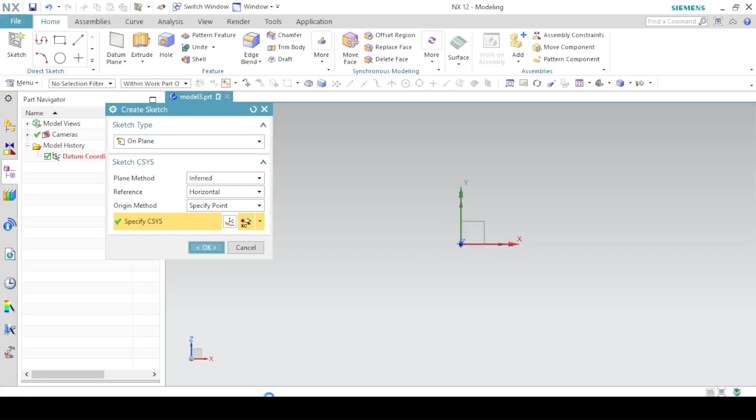We are going to start by creating a sketch on this front plane, and then we use the extrude command to add material. So sketch on the front plane. Now we sketch these four features, which are called obround features: the straight lines and the arcs that form the feature. The feature is called an obround feature.

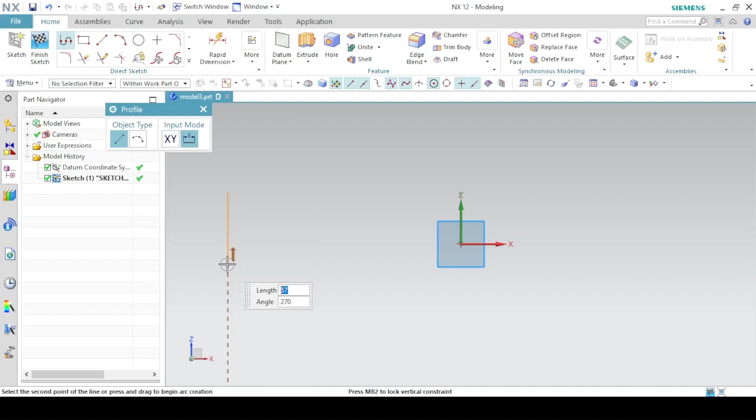So we use the profile tool to create the first one. So we have a vertical line, an arc, another vertical line, and an arc to close out the shape. This is how to create an obround feature. Otherwise, you can create a rectangle and then add circles at the ends and trim the unwanted arcs to get the same feature. So click on this line and make it vertical,

and we want to make the feature symmetric about this horizontal axis. So click on any midpoint here or here, and then click on this horizontal axis, point on curve. Now let's dimension. So the length is 40 and the width is 60.

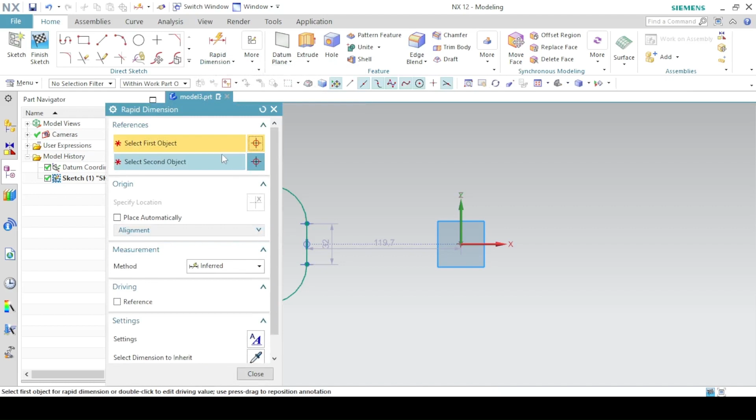Drag this here. This length is 40. I'll delete this dimension, and then this width is 60 millimeters. Now we have the same feature inside it with a thickness of 10 millimeters.

So instead of drawing it again, you come to this drop down, and then you see offset curve, distance 10 millimeters. Make sure you select connected curves, and then click on this curve. You can see it selects all the curves here. Reverse the direction for it to come inside. Okay.

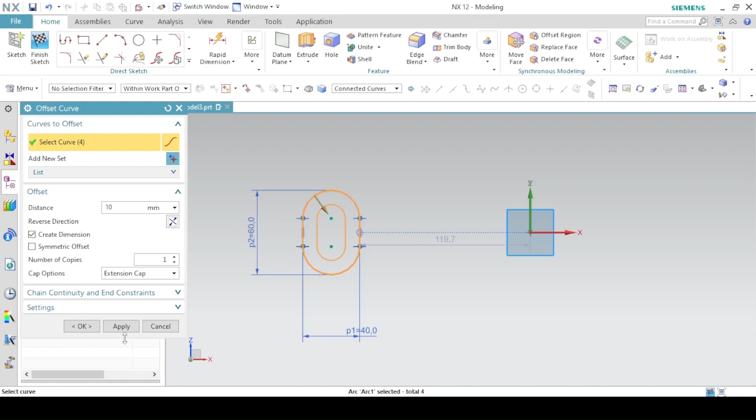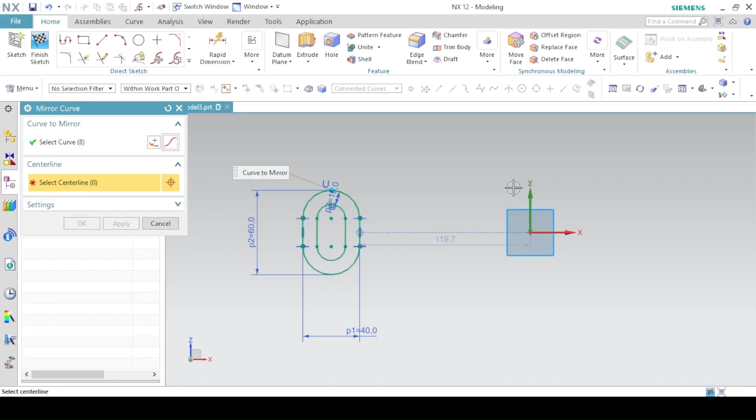Then you have the same thing on the other side, separated at a distance of 40 millimeters. So you're going to mirror. Come again to the drop down. We have mirror curve. Again, connected curves. Click on these two features. The center line should be the vertical axis, and then the distance separating these two lines will now be 40 millimeters. So the sketch is fully constrained.

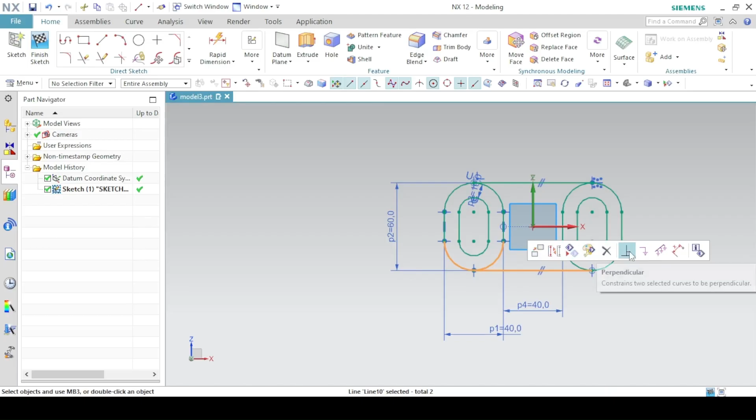Then you use horizontal lines to close the two shapes. Make sure the lines are tangent. So make sure the tangent symbols are showing here. If they are not, just click on the arc and the horizontal line. There will be a tangent relation between the arc and the horizontal lines. So finish sketch, then we start extruding.

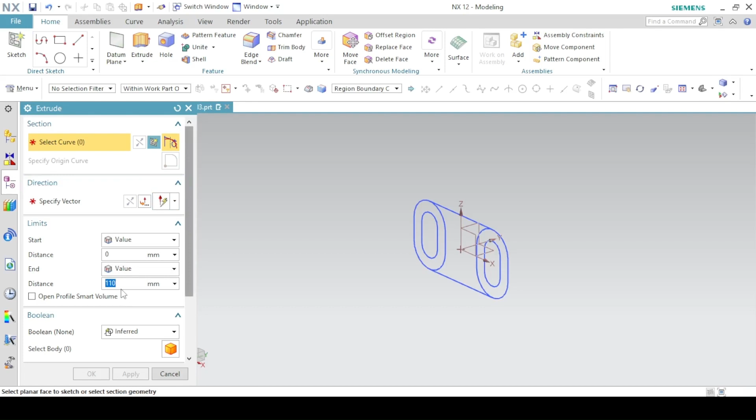So we are going to extrude in this direction. We first extrude this inside feature. We extrude by 25 minus 10. And then click on this area, apply.

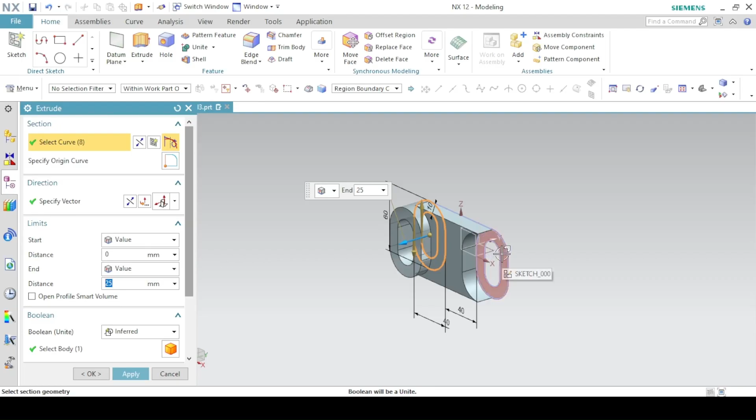Then we extrude the obround features here, these regions inside here, by 25 millimeters. So click on this area and this area. Make sure you've selected region boundary curves to be able to select the region. Now set the boolean to unite and then select this block to make them one.

Then we'll add this horizontal block here as well. So again, extrude, we sketch on this face.

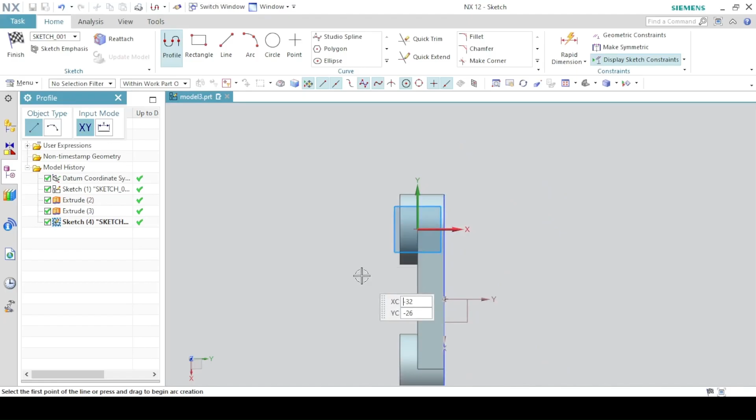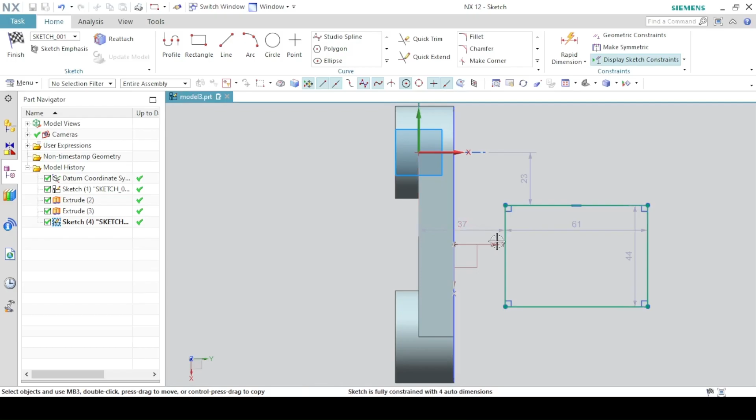You have a rectangle and then we can dimension. So you're going to place the rectangle somewhere on this line, and then you make sure the distance from the rectangle to the end is 27 plus 20 plus 15 to cover the full length here. So place the rectangle center on this center here, coincident. And then the length, as we saw, 27 plus 20 plus 15.

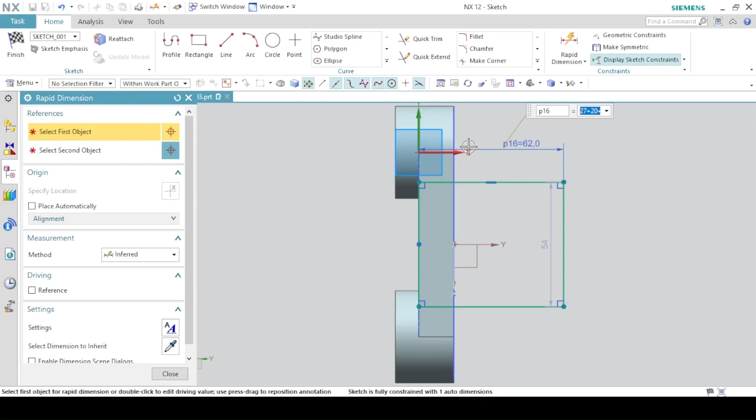So when you put the values here like this, the system will calculate as 62. The width, 40 millimeters. Sketch is fully constrained, so finish. Extrude down, so reverse direction. And then the thickness is 15 millimeters. Boolean unite, apply. Then we add a vertical block.

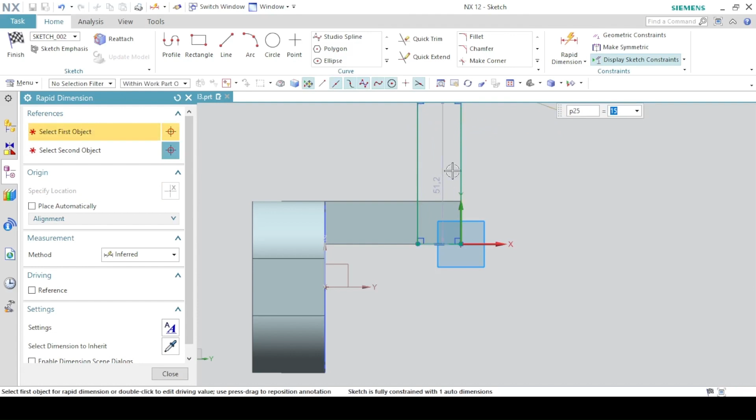So again, extrude, sketch section on this face. Need a block like this and let's dimension. So the length is 15, and then the distance from this face to the end of the block is 30. It should be from this face to this end here.

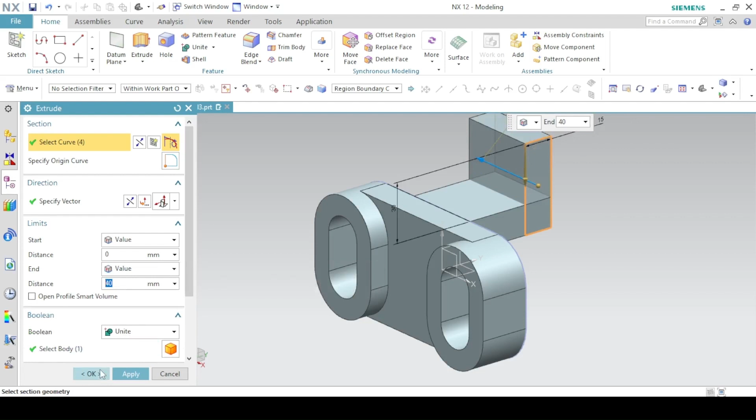Sketch is fully constrained, so finish. Reverse the direction, and then the thickness set it to a value of 40 millimeters. Boolean unite, again apply. And then you sketch the cylinder of diameter 30 millimeters. So we have two ways to do this.

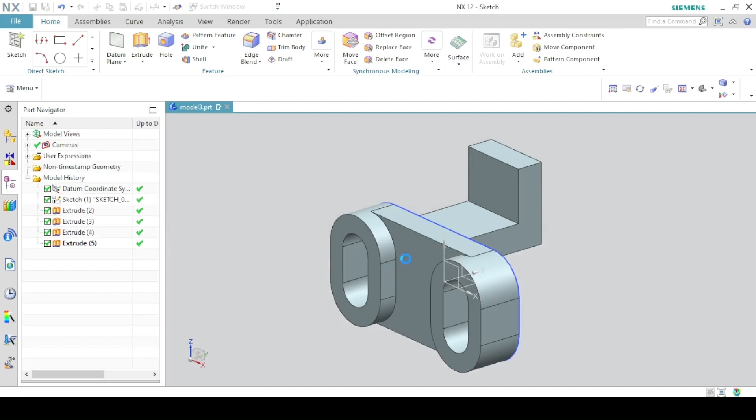We can either create a datum plane at a distance of 27 from this face here, and then start the extrusion, or we can create the sketch on this face and then add an offset before we extrude. So we're going to create a sketch on this face, a circle of diameter 40 millimeters, as we can see.

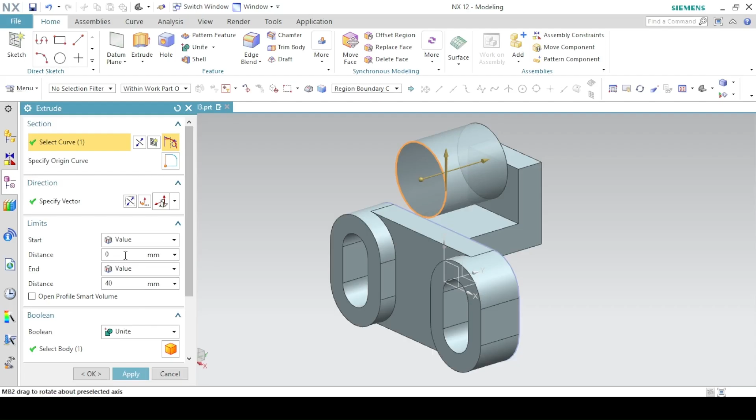Reverse the direction for it to go inside, and then we add an offset of 27 millimeters. So we start at a distance of 27. As you can see, this is the offset, and then we end at a distance of 27 plus 50 millimeters, which will be this. So 27 plus 50 millimeters, and the system will calculate the value for us.

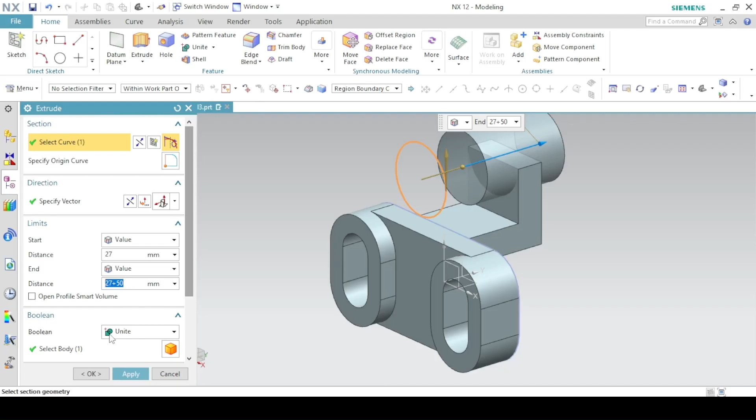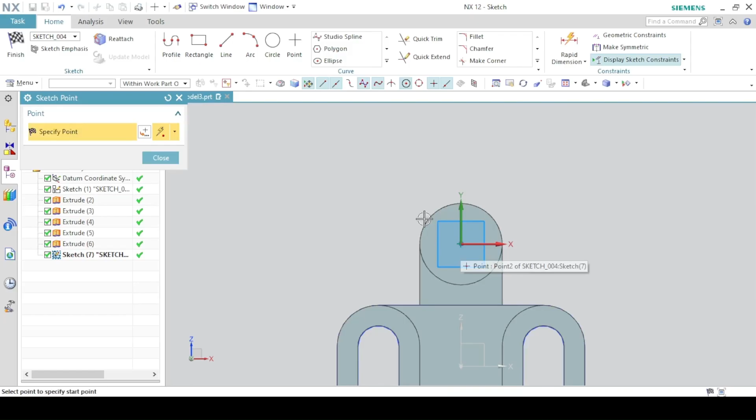Boolean unite, okay. And then we add a hole of diameter 20 through this cylinder. So hole feature, a simple hole of diameter 20 millimeters, sketch the center of the hole on this face of the cylinder. We have the sketch point tool already selected, so place the point in the center. Okay.

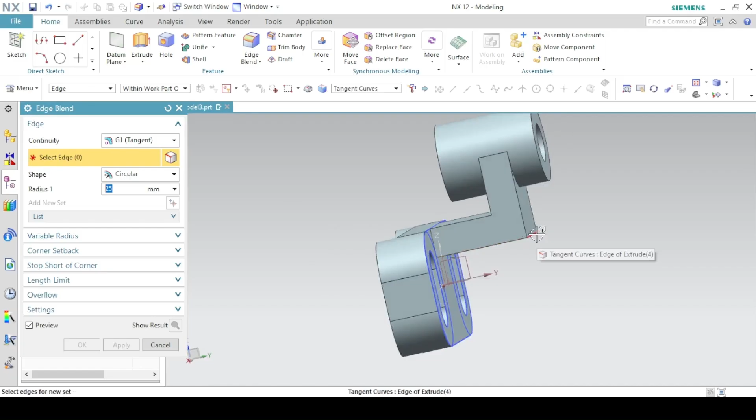Then we have these fillet edges of radius 25 for the outer and 10 for the inner. So edge blend, 25 for this outside, apply, and then 10 millimeters for this inside. Okay. You can hide everything but the solid body. So come to view, show and hide. We hide all, and then we show only the solid bodies.

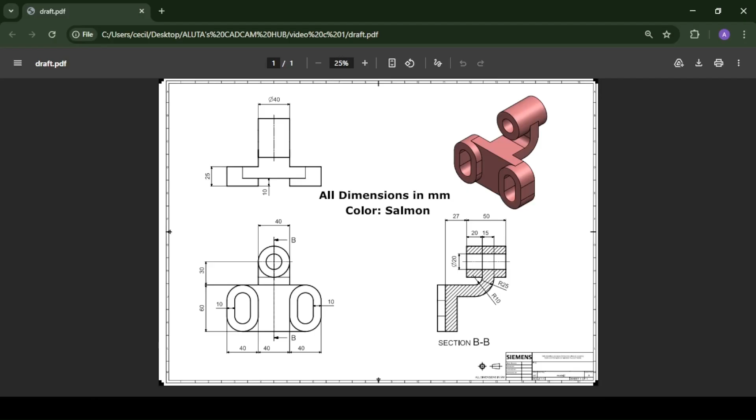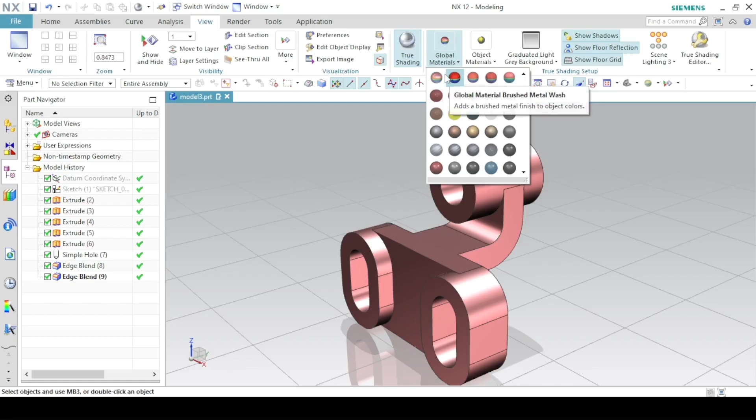Then the color is salmon, so edit object display, click on the body. Okay, change the color to salmon, so you have the strong salmon here. Okay, you can add a metallic appearance, so true shading and global material. We have so many metallic appearances we can give the block, so we go with the global material brushed metal wash. And yeah, that's how to create this simple block using Siemens NX.